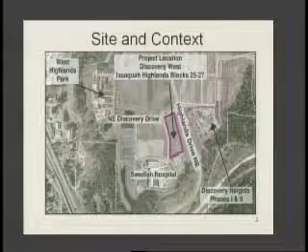So just to give you a 30,000-foot view, everyone here is going to be very familiar with the site. You see Swedish down there. This project is blocks 25 through 27, just north of Swedish, highlighted in red. You can see the existing Discovery Heights projects, phases 1 and 2, highlighted in a checkered red border. I'll walk through some highlights of the site, but this is just to show you from an aerial perspective the project scope and size. This again is kind of the same thing.

Just a summary of the proposal: it's just over 5 acres with a density of 41 dwelling units per acre, 209 units total. A brunt of those will be located in 2 stacked flat apartment buildings, with 4 additional buildings located in carriage units on the east part of the site, and we'll look at that in the site plan in a minute. The stacked flats max out at about 65 feet, and the carriage units are about 38 feet. This will be a traditional townscape neighborhood like phase 1, most of it anyway. There are some highlights of the site: trails through and around it, a dog run, pet area, pea patches, and a gathering area in the middle.

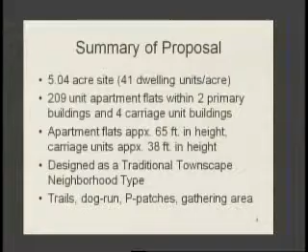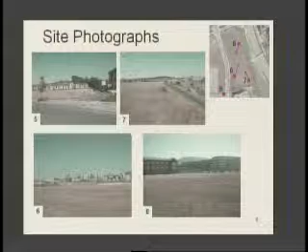So I think that gives a pretty good perspective of the site and what we have.

So knowing what we know so far, I've taken the site plan, which I'm going to show on the next page, but I kind of did just a rough overlay so we could get an idea of the building massing with what's around it.

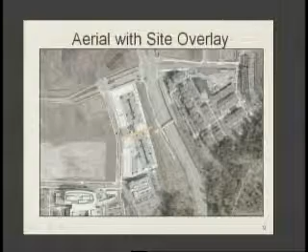The buildings here are white. They don't show up great, but I can point it out - I'll use the mouse. This is the biggest building, Building A, Building F here, and then the carriage buildings, 4 of them along here. Internal parking, and I'll talk about the vehicular and ped circulation momentarily.

A couple of amenities that are outlined that I wanted to highlight. There is a pet area at the north part of the site, with a gate from the Discovery sidewalk. Their main open space area, I've coined the central gathering area for lack of a better term, but we're going to regulate that as a vest pocket park, with some amenities I'll talk about in a bit. They also propose some garden plots, and the central waste area at the south where primary pickup will be.

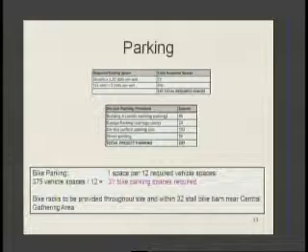As far as bike parking, they're well over. They're proposing a bike barn, which has 32 or 33 stalls, as well as other dispersed bike racks throughout the site. So they're only required to have 31, it looks like, but I expect they'll be up into the neighborhood of about 50 there.

Mike? Yes. Sorry, can you go back one?

This open space on the left, I know it's on sheet L102, but where is that relative to the overall? Sure, so it's identified here, central gathering area. That one, okay, thank you. So it's kind of right in the middle, and it goes right by the primary neighborhood trail there. Okay, the one that leads to the stairs down? Correct. Okay, thank you.

So those are a lot of the key features and highlights of the site. I'm going to go ahead and read some of the unique conditions that came up with a staff report. I have a question.

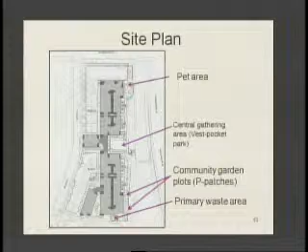Is it tract QE that has a bit of discussion? Where is that located? Tract QE, thank you. So tract QE, it's not really delineated very clearly on this, but just for sake of discussion, it is most everything to the east of their buildings. So it kind of starts right in here, right here, and then all the way down to pretty much Highlands Drive. It's tract QE. Thanks, I should have identified that.

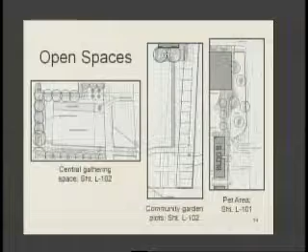Without further ado, I'll just run through these conditions and then we'll give Devco an opportunity to present. So we had a total of 50 conditions with this staff report, and it looks like we have maybe a dozen that aren't your boilerplate, so I'll run through those quickly. This starts on page 33.

Starting with number 2 — actually, I'm going to read number 1, that should be on there, that got missed. To ensure that property lines do not bisect buildings, a lot consolidation or lot line adjustment must be completed prior to the issue of any permits that allow construction of structures.

Number 2, prior to submittal of construction permits, building or utility other than grading, the applicant shall execute a sales agreement with the city to purchase the area containing any site elements — trails, dog run, pea patch, etc. — which are located outside of the project boundary. If the city and applicant are unable to negotiate the sale of the property, an easement for the area's use may be considered.

Number 4, prior to the first temporary certificate of occupancy, the relocatable trail easement shall be moved in accordance with the final placement of the east-west neighborhood trail.

Number 12, the area between buildings A and F will be designed as an auto court which provides welcoming, pleasant, unified design accommodating the various pedestrian routes, parking, and entry to the project. Non-asphalt paving will be used, which through color, texture, and design communicates the various uses and users. Parking lot landscape standards must be met within the auto court consistent with Appendix P. The auto court will be designed in a single plane, avoiding the use of curbs to emphasize the holistic nature of the space.

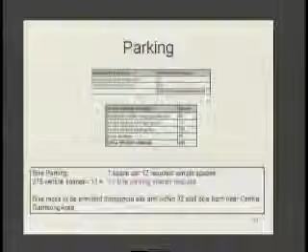Okay, on to number 20. Prior to the approval of the first building permit, a special report must be submitted which either shows that no additional loads are imposed on the walls or that the additional loading has been mitigated.

24, the southern driveway must be signed for right... sorry, that was loud. What walls? In 20, it says imposed on the walls. Which walls are you referring to?

I'm sorry, let me make that a little more clear. It's the spar walls, the Sammamish Plateau Access Road, basically the walls you see when you come up Highlands Drive. Dan can speak a little more to that, but those are the walls we're talking about here.

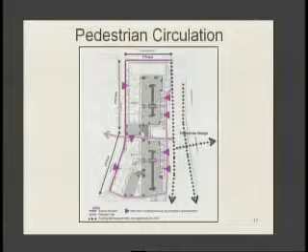I think the next one is 23. You were about to skip over it. Oh, did I skip one? You were almost... on the list. You were about to skip it.

Sorry. 23, the pedestrian ramp on the northern driveway must be aligned with the adjacent walkway, and a receiving curb bulb and ramp must be constructed on the west side of 8th Avenue Northeast. The relationship of these two elements will be evaluated during the review of the utility permit.

Can we look at a map on that one real quick? So here we're talking about the ped trail that crosses below parking lot A, and we're just making sure there's a receiving ped facility on the opposite side.

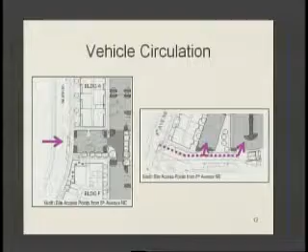Including a crosswalk or no? It might be a crosswalk, it might not. If you have facilities on both sides, there's a crossing, you just don't have to stripe it. Yeah, okay, just curious.

That covers 24... so on to 35. One additional loading, and this needs to be... hold on, we missed 24, I think. Did we not? I don't think we read that out loud. Oh, okay, the southern... 24, the southern driveway must be signed for right-out only vehicular turning movements.

Additionally, the configuration of the curb bulb will be reviewed with the utility permit to ensure that traffic and emergency turning movements function safely. So that's the shared driveway, right? And currently it says exit only.

Will that be changed completely? Is that configuration going to change? I believe there's a sign on that driveway that says exit only. Yep, the configuration would change so that you can enter in.

So right now, is it one lane out? It'll be configured to two lanes, one in, one out, and it's right turn only from there. I think it's been a choice by ProLiance to make it exit only, and since it's only for their use, we don't have a concern about that, but that road actually straddles the property line and was always intended to be a shared two-way road.

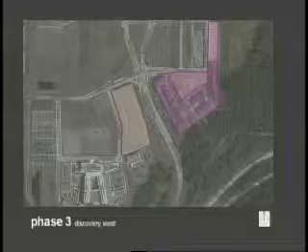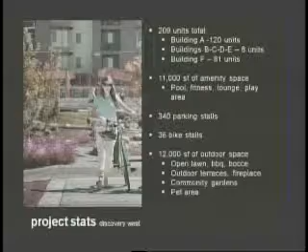I'll go fast on these — Phase 1, Phase 2, our phase. We've talked about that, but really briefly: 209 units, about 11,000 square feet of interior amenity space with indoor pool, fitness, lounge, and play areas, 340 parking stalls (we've found one more), 36 bike stalls in the bike barn plus a few more bike amenities sprinkled throughout the site, and 12,000 square feet of outdoor space including open lawn, outdoor fireplace, terraces, community gardens, and the pet area.

I've turned it so north is that way. The larger building has the parking garage and the entry court; building F has most of the interior amenities; buildings B through E are the smaller carriage units with parking garage below.

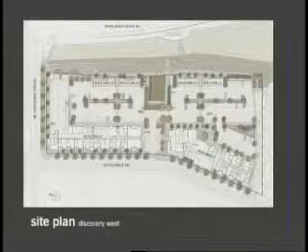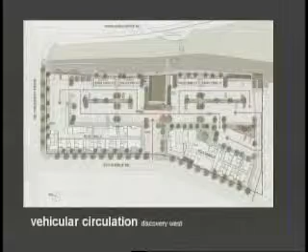We've got our main entries and circulation within the site. I have a moving section here going through the site north-south, looking west — the south, building F, the Auto Court Plaza, and then we're bringing the grade down to reach the parking garage below, massaging the site in this portion of the parking lot to get to that lower level.

Next, I wanted to talk about the trails and the trail system. The main trails are in purple, smaller scale trails are in blue, and they sprinkle the site and tie everything together. We wanted to make sure we were creating connections to the north, to entertainment, to Swedish, to the rest of the trail system going toward I-90, and internally as well.

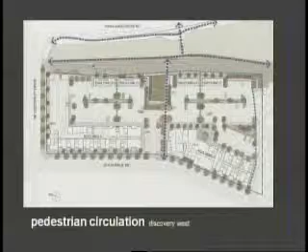We are creating rain gardens within the parking lots, so these inner islands will collect water and serve as a stormwater feature and sustainability education for the residents.

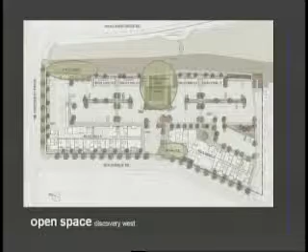So location, really quickly: pet area, open lawn and gathering area. We've got terraces adjacent to the amenity spaces, and community gardens on that edge.

I have really quick enlargements — here's the pet area. They need designing, but they need approval first.

Here's the trail and the main open lawn. We've got a bocce court, picnic and barbecues, amphitheater seating along this edge. The bike barn is in this location, at the intersection of the main trail and the other trail that's north-south along the carriage homes.

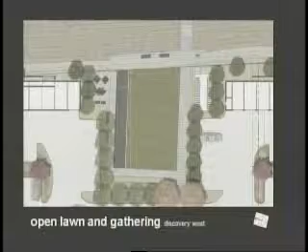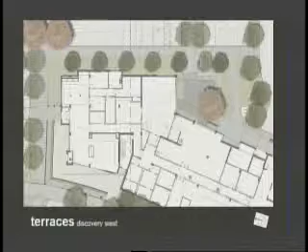We've got these little terraces that we want to have an outdoor-indoor connection between the lounge space, which wants a vibrant edge and something lively on the sidewalk that brings nice public vibrancy. Then another small space in the back that's overflow for fitness or the indoor play area, so it can be lively too, or used for stretching or games. Here's a quick view of the pea patch area and a small seating node.

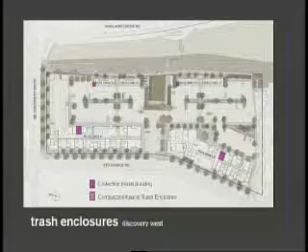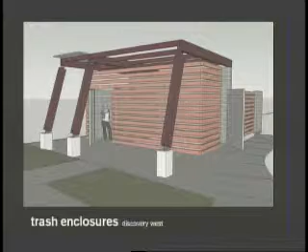Trash enclosures are all indoor. The collection is all indoor, and then it's brought to the corner. Here's one we have in phase one, and this is a preliminary SketchUp view of what we're thinking of. The actual enclosure would have the compactors back here, but it's just preliminary.

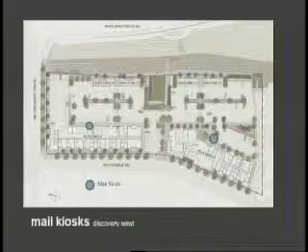Mail kiosk locations are at the secondary entrances, so they need to be close to a parking lot for USPS convenience as well as residents. A couple of mail kiosks that we've done in previous phases, so we're looking at the design language that you just saw on the trash enclosure to repeat itself as a pattern.

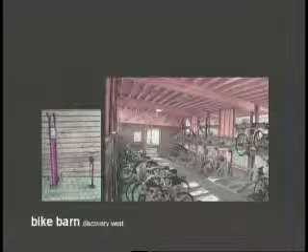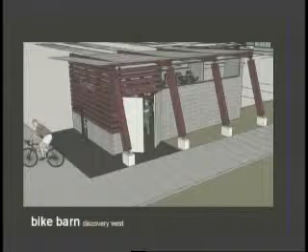And then the bike barn—a nice thing is this is the character for the inside, so really the bikes would be attached to the walls, secured completely for residents. We'd have a fixed station and a bike pump outside the bike barn on the trail, completely available to anybody that needs a little air or a fix. That's definitely a nice amenity for the community as a whole, and that's a quick SketchUp view of what we're looking at for the design.

Planting palette, kind of mostly deciduous trees. We do have some evergreen accents, but we want to use trees in an architectural way—a lot of evergreen with accents of deciduous with flowers and evergreen ground covers. We do have the rain gardens, and that's where we expect maybe a little more grasses or things that have dynamic effects. And that's it.

Thank you. Thank you very much.

Thanks, first of all, great photos. I always love the visuals, they really help a lot.

Should I stay here or? I don't know, we're going to have some questions, so maybe you could stay there, and Mike, you may have to pop up again, I guess. Or Dan, if we hit him up with some brutal questions.

So before I ask anything, I guess I'll just open it up to the commission. I'd like to have a small discussion here, ask questions, and then if there's anybody from the public that'd like to speak, we'll have more time to talk. So I'll go ahead and ask—Carl, do you have something? This might be to Lucy, too.

I was curious about the bike barn and its location. It sort of looks like you put it in a two-dimensional world, like it's close to the trail, but as someone who uses that trail a lot, I'd find it more convenient if it were closer to 8th Avenue, because the last thing I'm going to do is get my bike out of the bike barn and then go down the steps. I'm going to get on a bike and roll out to 8th and Discovery and go down and around. So if it were farther on the west side, it seems to me it'd be a better location, but that's just my view. I'm curious if you have any feedback.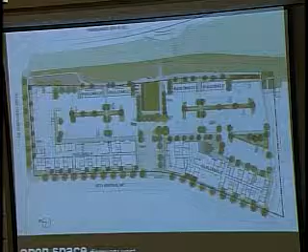And just so those meet standards from the city. Okay, so 20 foot, I would just add that. The 20 feet where cars are not backing out is just the drive aisle, like in the parking lot. That's the standard used throughout Issaquah Highlands. You can find it throughout Regency, pretty much throughout the entire project. That is exactly my next question, so thank you for that. Okay, great, thank you.

Yeah, I have a few. My first question is related to condition 2. I'm curious where that applies to, about the city purchasing an area outside of any site element.

So, actually, I'm going to jump up to the lectern. I actually have a slide that shows this. Oh, okay, great, I didn't put the end in. Well, you know what, this slide shows it. Oh, sorry, it's coming, it's the dog. It's after the dog, that's my just-in-case slide.

Okay, so in blue is the zone that we'd be looking at for active use or use for trails. So the dog park, the trail and its new planted edges, the stair connection, and then the whole trail that connects, and then a portion of the community gardens are in that zone as well.

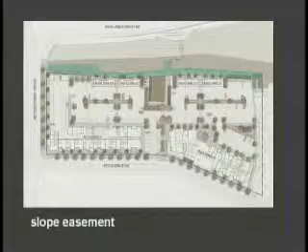And then the conditions actually state that the applicant would need to revegetate the whole slope up to the trail, which we would do as part of it. So I just wanted the visual, but you can explain what the rest is.

So the condition just talks about, right now they're showing some elements that aren't on their property, they're on the city's property. The red line delineates the property boundary. The stuff shown in blue is currently on the city's property. We've started preliminary discussions, and the administration is supportive of likely selling that portion of property to the applicant so that they can get the dog park and potentially a portion of their trail and part of the pea patch on their property. That's what that condition's getting at.

I would just add that part of that is also, when we reviewed Phase 1, there was a lot of interest on the commission in terms of how things appear and how that edge is treated. So instead of making a bright line when we got up against a piece of city property that is just a slope and not used, if there was an ability to regrade and have things that come up to the edge or even spill into the city property, we thought that would make a better transition between the project and the trails and the slopes.

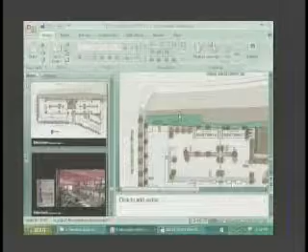And did you have a second condition that you were concerned about? No, it was those two in combination because they just said walls and spar walls, and it was unclear what was where, so you might want to clarify that, Lucy, and I will make changes.

Those a little bit more clear with the briefing response. Super, thanks, Mike. Back to Mr. Beard. Hold on, oh, 9 is okay, still on that one, I think.

The condition number 20, I think it was, not just with aesthetics, but with the load. And I wanted to, maybe in the next meeting, first I want to express my support for asking the questions about this interface, not only because of the elevation, the grade, the walls, but the relationship with city-owned property and issues of maintenance and when we're talking about managing the load, their relationship with the responsibility to the city. So I'd like to have a little more information. I think we're running out of time tonight, but that was an area of concern for me.

So I'm sorry, just to make sure I'm understanding your question, Nina, you're talking about maintenance of these various pieces? Well, if this Number 20 is saying that there should be this report that's submitted that either shows that no additional loads are imposed on the walls or that the additional loading has been mitigated, so on the surface this is showing that this is being attended to and there's a condition for it. So I'm saying, great, but I just wanted to make sure that we paid enough attention to it, because it does involve a relationship between the private property and the city property next to it and the responsibilities. And I'm remembering back to the Lakeside Development Agreement, where these interfaces are and whose responsibility it is when something fails, and the vulnerability of those places and so on.